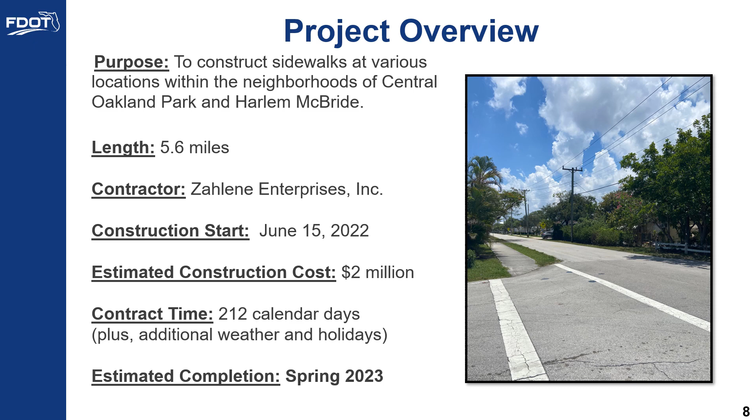Slide 10. The MPO's Complete Streets and Other Localized Initiatives Program, or CSLIP for short, is a competitive grant program that provides funding opportunities for small, local transportation projects which improve the safety and mobility for all transportation users in Broward County. This program can fund projects such as, but not limited to, complete streets projects, traffic calming and intersection improvements, ADA upgrades, mobility hubs, bike racks, and technology advancements such as transit signal priority and traffic control devices.

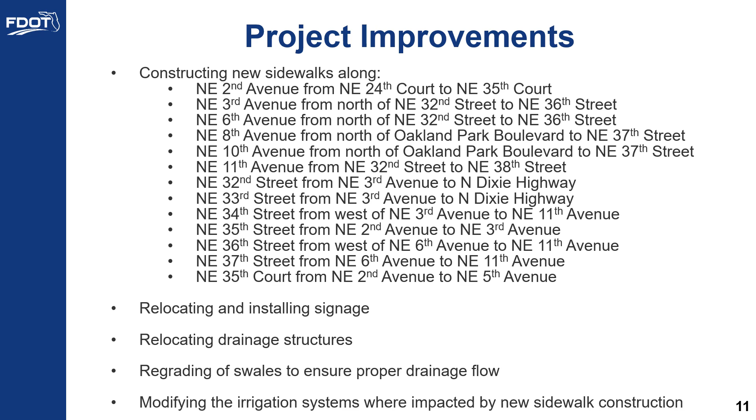Slide 11. Improvements as part of this project include constructing new sidewalks along 13 different corridors, relocating and installing signage, relocating drainage structures, the regrading of swales to ensure proper drainage flow, and modifying irrigation systems where impacted by new sidewalk construction.

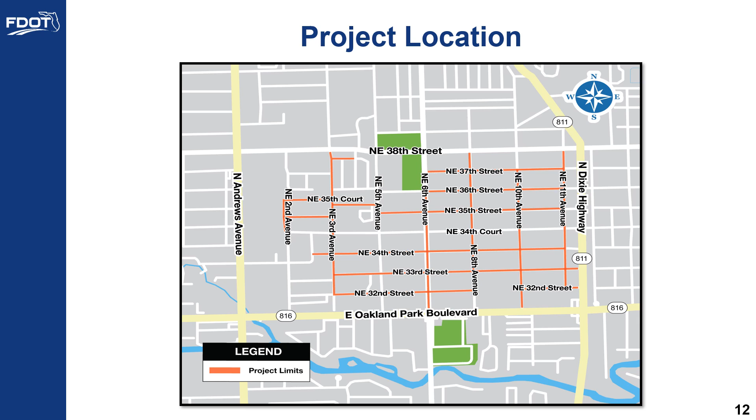Slide 12. New sidewalks will be built along Northeast 2nd Avenue, Northeast 3rd Avenue, Northeast 6th Avenue, Northeast 8th Avenue, Northeast 10th Avenue, Northeast 11th Avenue, Northeast 32nd Street, Northeast 33rd Street, Northeast 34th Street, Northeast 35th Street, Northeast 36th Street, Northeast 37th Street, and Northeast 35th Court.

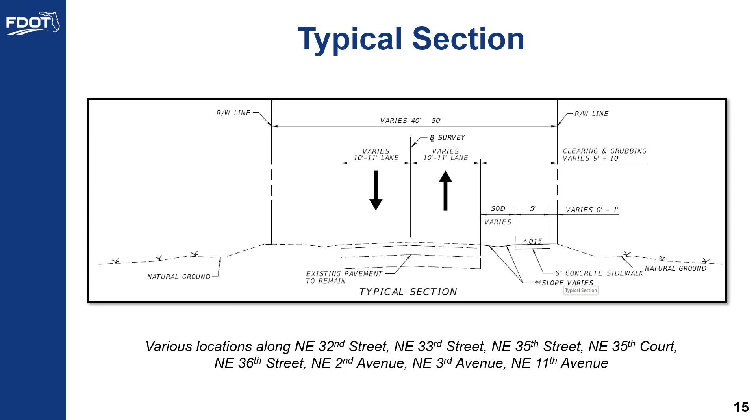Slide 15. This is a typical section with 5-foot wide, 6-inch thick sidewalk going to be installed at various locations along Northeast 32nd Street, Northeast 33rd Street, Northeast 35th Street, Northeast 35th Court, Northeast 36th Street, Northeast 2nd Avenue, Northeast 3rd Avenue, and Northeast 11th Avenue.

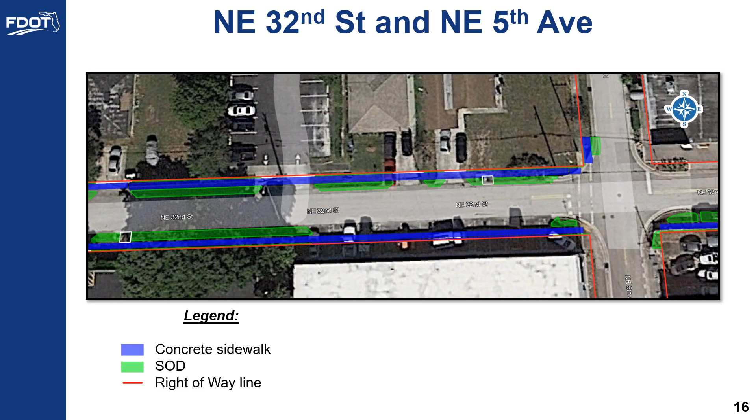Slide 16. This is an overhead view of Northeast 32nd Street and Northeast 5th Avenue. The red line represents the right-of-way. The blue area represents the concrete sidewalk to be placed, and the green represents the sod and swale areas, and the white boxes shown are the drainage structures.

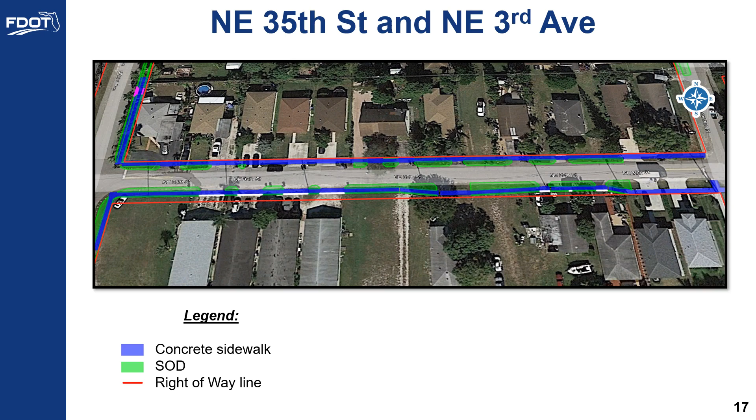Slide 17. This is similar to the last slide, an overview of Northeast 35th Street and Northeast 3rd Avenue. Once again, the right-of-way line is represented by the red line below. Blue represents a concrete sidewalk to be placed, and green represents the sod and swale areas.

Slide 18. This is the overview of Northeast 10th Avenue and Northeast 35th Street. Red represents the right-of-way line, and concrete sidewalk and sod placement to only be done on the west side.

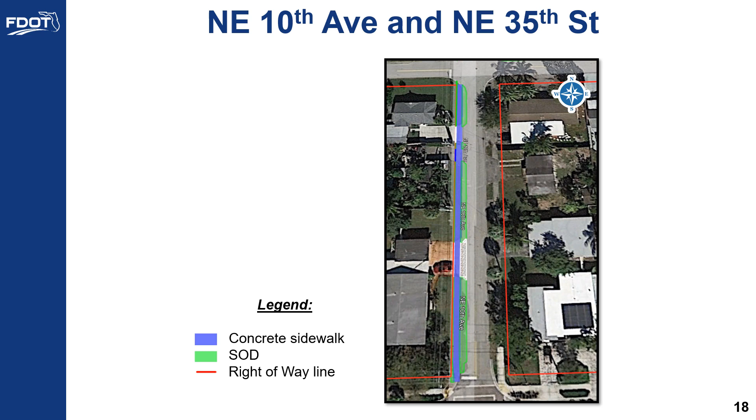Slide 19. This is an overview of Northeast 6th Avenue and Northeast 33rd Street. Concrete sidewalk and sod placement to be done on the west side of the existing roadway.

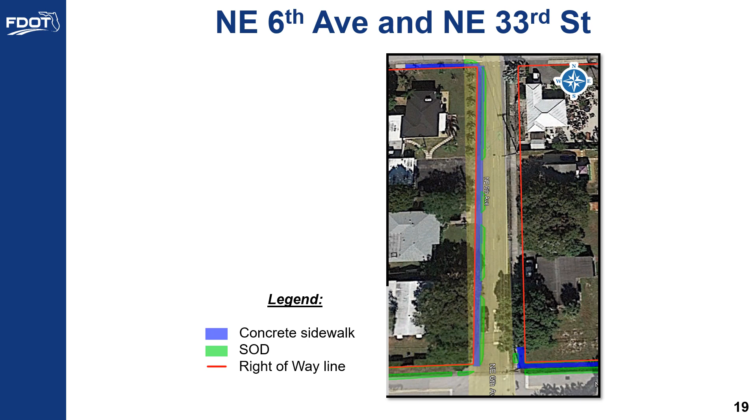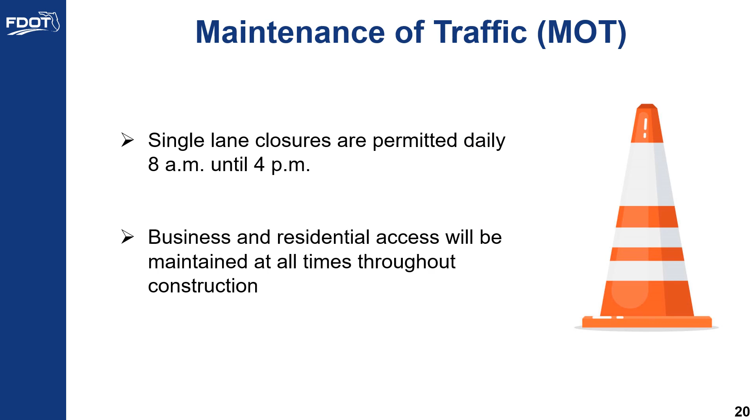Slide 20. As part of this project, single lane closures are permitted daily between 8 a.m. and 4 p.m. Business and residential access will be maintained at all times throughout construction.

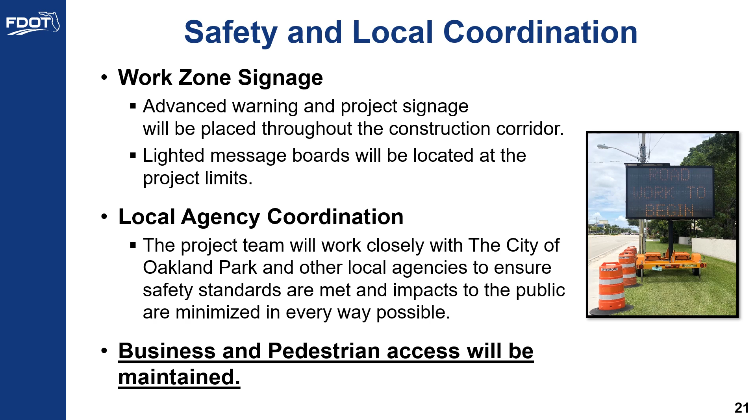Slide 21. Safety and local coordination. Advanced warning and project signage will be placed throughout the construction corridor. Lighted message boards will be located at the project limits. The project team will work closely with the City of Oakland Park and other local agencies to ensure safety standards are met and impacts to the public are minimized in every way possible. Business and pedestrian access will be maintained at all times throughout construction.